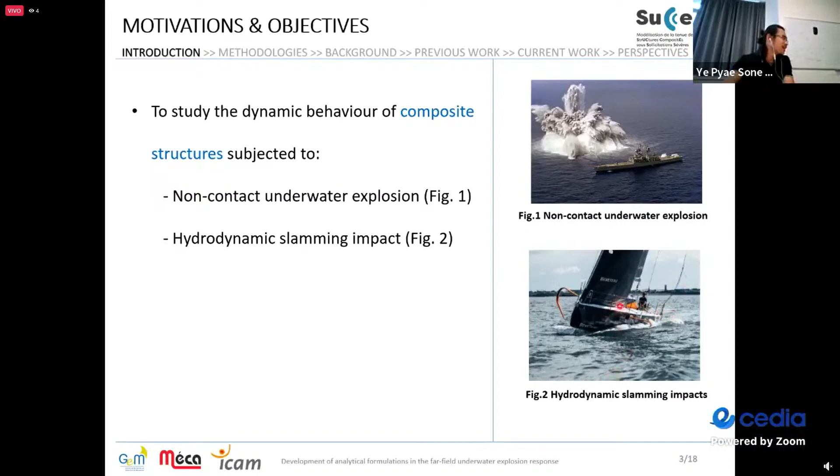For my presentation, I focus only on the underwater explosion, to limit the scope. We have some practical application structures, something like the sonar dome, or underwater ROV, remotely operated vehicle. And when you have a mine, and it explodes, you could have damage to your robot.

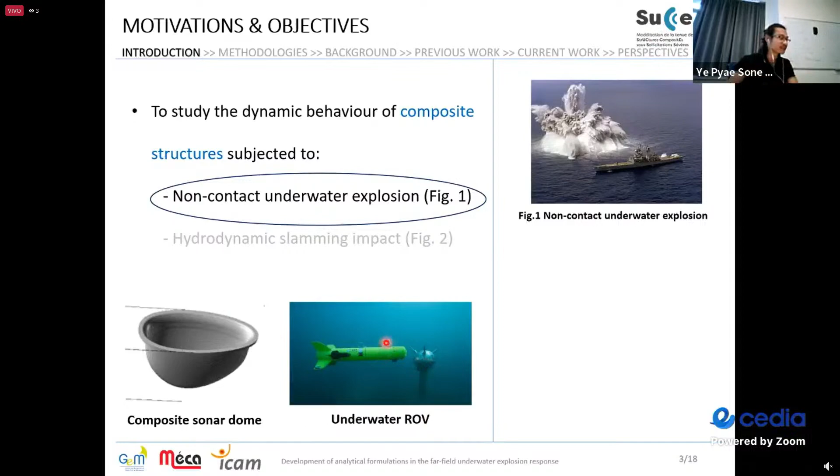So we will see. Regarding the methodologies, we have three main methods. As everybody knows, first we have the experimental way to study how the explosion behaves. For example, this is one of the tests from a couple of years ago, in Toulon, a city more in the south, one of the bases of the French Navy.

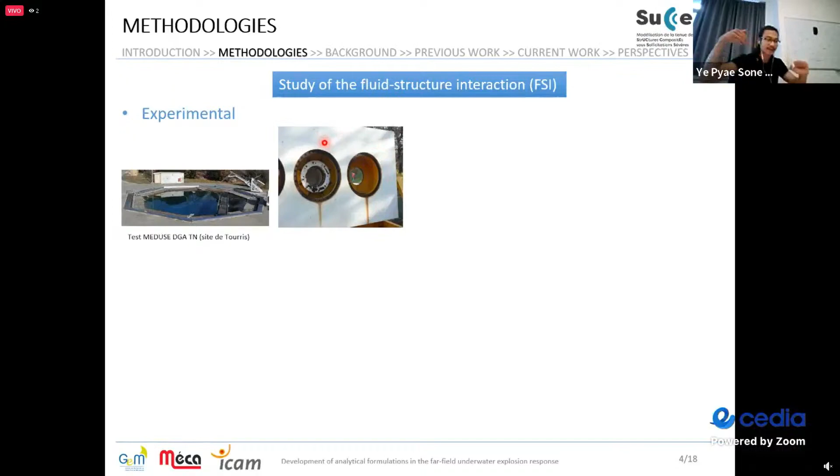They have what I would call a detonic basin, meaning a pool, where you put the explosives and then explode. They use this sort of structural setup, a main frame that holds the structure, and then you have the effect of the explosion. I will show you the schematics here, so you have this frame.

The frame, and then you have these plates. This is one of the plates. You can test, for example, 3 different plates simultaneously like this, to understand the directional effects of the explosion, for example when you are directly under the charge, or at some angle from the charge.

So you have the target plate, which is a circular shape, but can be any material you like: aluminum, steel, or composites. In our case, composites means carbon fiber epoxy or glass fiber epoxy, which is the main material we would like to study. We have this explosive charge, and then these submerged frames—usually sometimes we hang it, or sometimes it floats, at the natural buoyancy point.

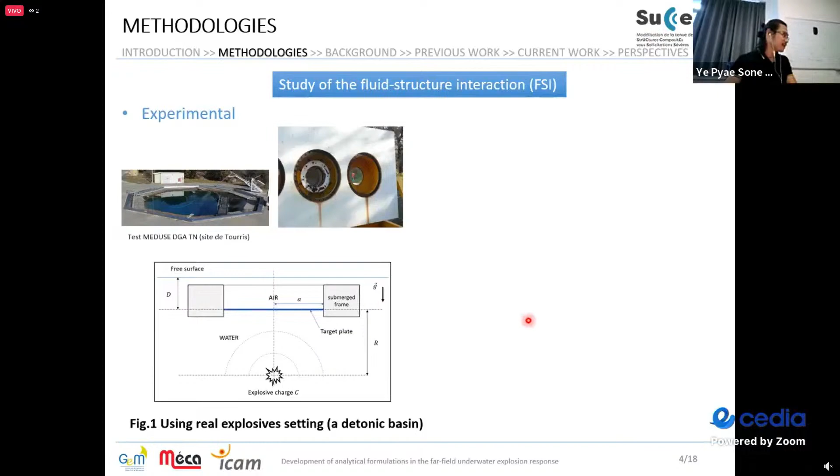And then there is air behind the plate, so you have water on one side, then the explosion wave, and air on the other side. I don't think there is a camera here, but you observe using the strain gauge, and sometimes you can measure the plastic deformation. There is also some sort of test—we don't have it in France, but this is one of the photos from the United States.

So in 2015, in China, United States, and I think in Australia, they have these sort of facilities. They try to mimic the shock wave of the explosion. I'll show you later some plots of how it works. For now, these are the sort of facilities we use to understand this.

The advantage of using this sort of setup is you are working at a smaller scale, so it's less expensive than using a pool, and you're in a more controlled way, so it's less dangerous because you don't need to deal with real explosives. For example, you have this pressure tank, and then you have some sort of diaphragm, and then you increase the pressure.

At some pressure the diaphragm will break, and then there is something called a projectile somewhere inside the gun barrel. When the valve breaks, the projectile will travel all along the gun barrel and then hit a water chamber. There's some sort of rubber or something, and when it hits this diaphragm, it will generate a shock wave. It's more of a one-dimensional propagation of the wave. It's not exactly the same, but this is another way of trying to mimic the loading from the explosion.

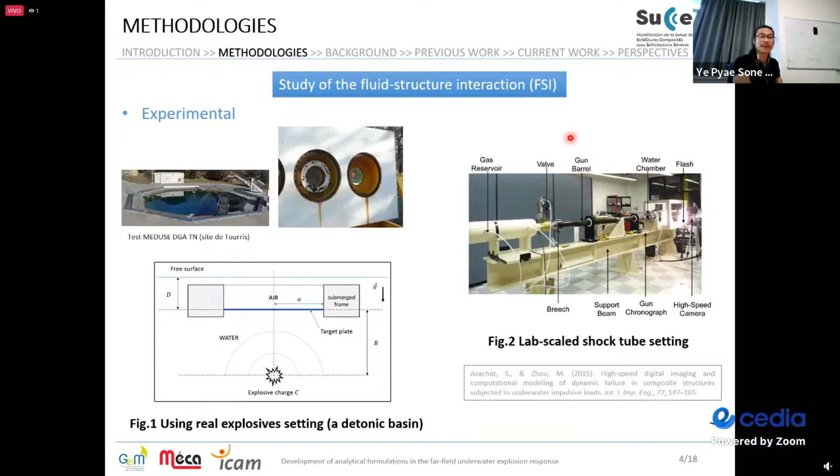So let's go to the second method we use to study this sort of explosion, which we call numerical. I'm sure everybody knows we use finite elements, and there are a couple of different ways—many different ways. So I try to limit my scope to what I studied during my doctoral studies.

Otherwise it would require a lot of tools and numerical setup to study these sort of explosions. So here what we can do is calculate the pressure—I'll show you the equations later—and then calculate the equivalent impulsive velocity. This is a very easy way to do this, because you can model just the structure. You impose the impulsive velocity on the shell element, and then you study it. It's just an initial value problem, and very quick, but I'll show you the results later.

This sort of approach is not always very sufficient. It is very fast, but there are some discrepancies—some differences when you compare it to the experimental results.

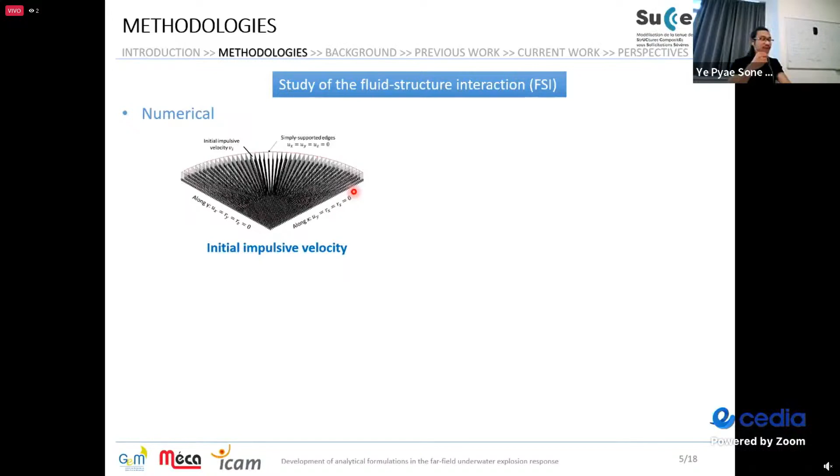The second sort of tool is called LS-DYNA. I use LS-DYNA a lot. It's a nonlinear commercial finite element tool. You can also try Abaqus, or Patran—maybe Patran isn't very efficient when it comes to dynamics, but you can use Abaqus, for example. And LS-DYNA becomes basically the same as ANSYS right now, because they bought it.

There's also a letter like USA, which means Underwater Shock Analysis. It's a special extension of LS-DYNA. Normally we don't have access—you have to request access from, I would say, the military, or you need special permission and a special license to use this tool. So it can sometimes be quite administratively complicated. Not everybody has access to this tool.

So, going back, the second part of the approach is the boundary element approach. Here we don't have any fluids anymore, just a structure, but we have this boundary. Maybe some of you know what boundary element calculations are. We don't really use fluid elements, but at this boundary we treat it as if there is something like a membrane of fluid encompassing the structure. So there is a structure, we don't have a real fluid. Why? Because to include the real fluid would take a lot of time and be very difficult.

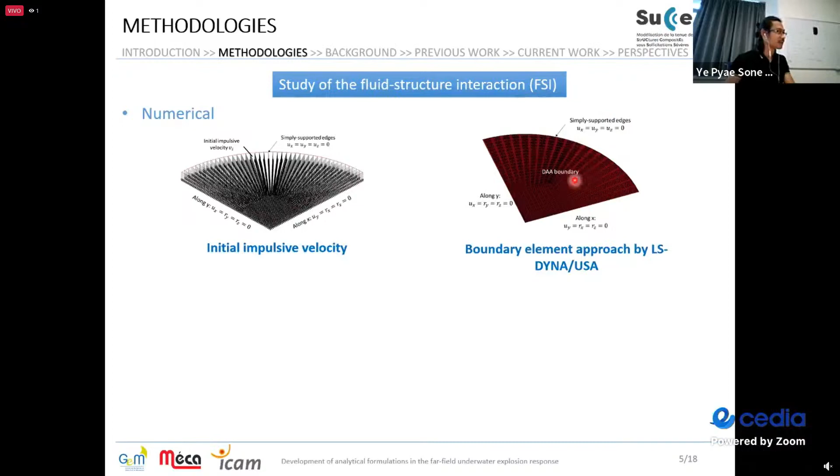By the way, I only show something like a quarter of a circle because we want to study the circular plate, but if it is symmetric, if the explosive charge is directly under the plate, you don't need to worry about the asymmetric effect. Maybe in reality there might be, but in the simulation this is completely ideal, and the loading will be symmetric. So the deformation is symmetric, so you don't really need to model the whole complete plate, just a quarter is sufficient. Then you apply the symmetric boundary condition here and here on the edge.

And then here is something like a simply supported condition. You can try a clamped boundary also. You can try many things.

It's very fast. And then the last approach, you also model the fluid, but it is not the real fluid elements. Real fluid elements, I mean the fluid elements which we use in CFD software, but that is really expensive. So we are using something else, something special. We have a lot of special tricks to save time.

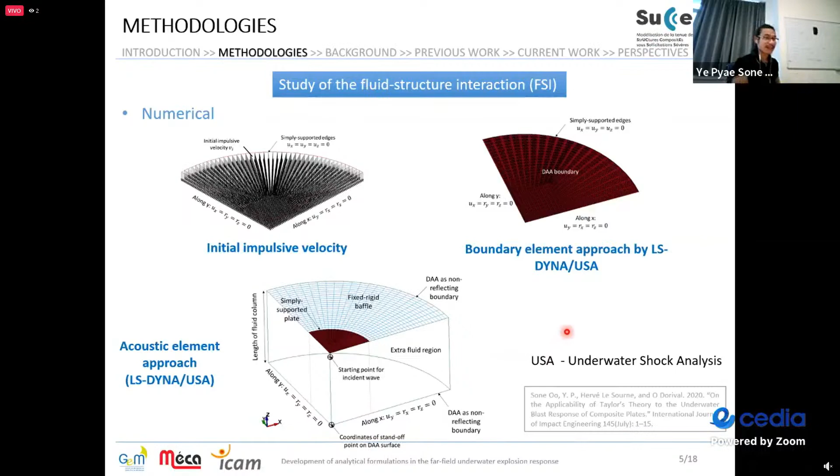But then what about the reliability? I will show you in a couple of minutes later when I compare all these results with the experimental results. We have a lot of tricks, and it takes a lot of time to model this problem. Even though you see it's only a circle, only a plate, it can be really difficult.

And then the final approach, which is also my thesis, is about the analytical development. So analytical development means - numerical tools are always generic, always general. You have these sort of equations, and I don't want to repeat all these. How is it about this numerical approach?

But analytical tools mainly come from the first principles. So first principle, something called a physical sense. They come from some physics, some geometry, and then you derive the equations according to these. You have governing equations, you have boundary conditions, you have an initial condition. So you have the partial differential equation, you solve it, and then you have the final equation to solve.

It's very easy - not so easy to derive, but very easy to implement in some programming tool like MATLAB, for example, or Python. So here is one of the plastic deformations, the deformation of a cylinder. You have an explosive charge, and you have a plastic deformation. So all this form, you model it.

So this is not exactly my research. This is one of my predecessors, the one before me, but working in the same laboratory. He developed a model for a cylinder, represented as a plastic string resting on plastic foundations. Okay, I will skip the details, otherwise it will be too complicated.

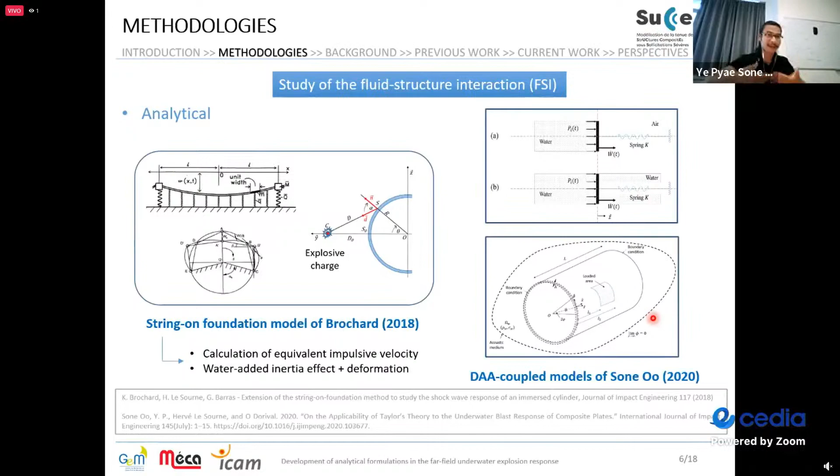So why are we developing analytical methods? I would like to repeat again why, because you can see numerical, everybody is doing this, but then you have to remember that it can be computationally expensive. It means it takes a lot of hours, many hours. Sometimes we don't want that - we want some results really fast. And then it is complicated because compared to the analytical tool, numerical is much more complicated because you have to set up your model.

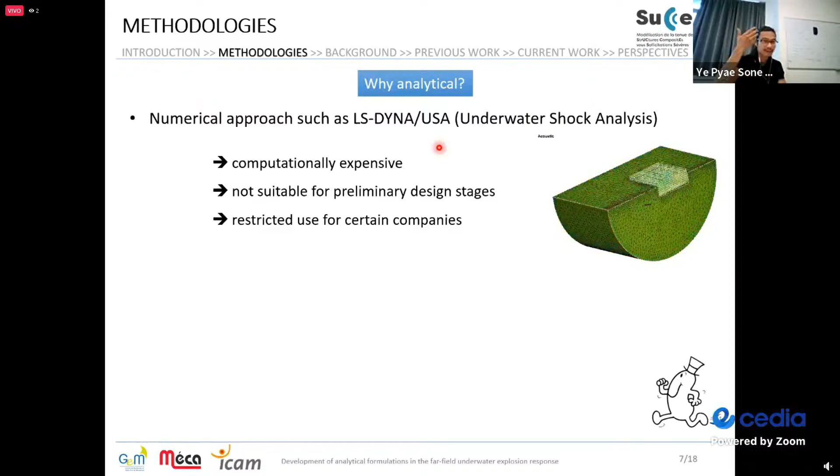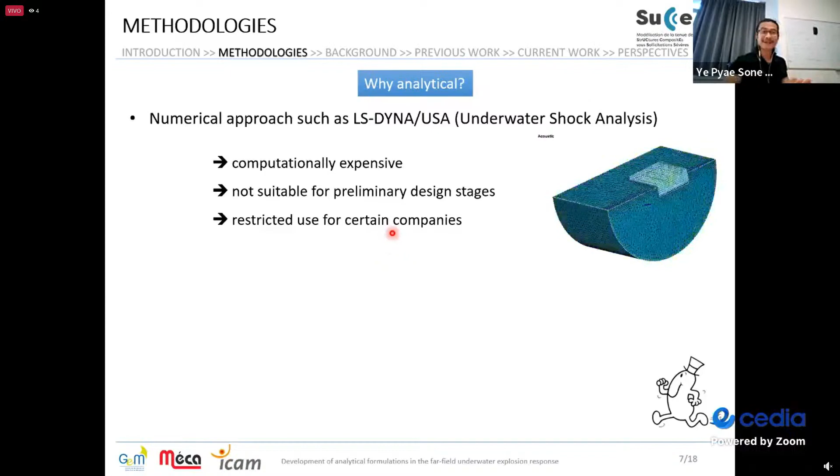Not only the modeling, you need to know the parameters, and then you set up all these parameters, and you also need enough experience and knowledge to know what you are expecting, what your results should be. And then when you interpret the results, it can also be challenging. I have shown you this tool for this problem - sometimes you have these administrative complications. So the analytical approach is very fast, very simple. Of course, not so easy to derive, but once somebody already develops it - for example, there are so many papers - you can take advantage of that.

You can code in MATLAB or Python, and then you can study so many design studies. So the only drawback is sometimes analytical tools only work for really simple geometries, like a square or rectangular plate, circular plate, or a cylinder.

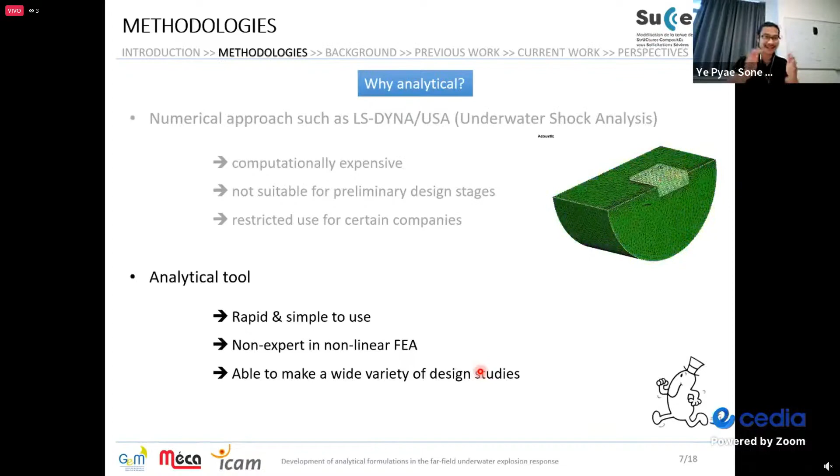Okay, so now a little bit of basics. So we have the explosion - this is an exothermic chemical reaction. It's really an unstable compound. So you imagine you have an explosion - boom - and then there is a shock wave.

There are so many aspects, I will show you another slide later, you will see. But first of all, when you have an explosion, what you need to understand is you have this very unstable compound, and then it releases a huge amount of energy - energy in terms of temperature, so very high temperature, just very hot, and then a huge amount of pressure.

So the water immediately around it is compressed, and then this compression goes into another place, so it is like a compression wave going. So at first, the compression wave is above sound speed in water. So at first it is very fast and the pressure is very huge.

But then the pressure is falling, and how do we know this? A lot of people already studied this, mainly with a lot of developments during the Second World War.

In fact, research already started in the First World War, but a lot of documentation I found was during the Second World War. They already tested using pressure transducers, which existed around 1930, 1940s, 1945, 1950s, and later on continued to study. Even though we had some treaties, people studied in their own smaller scales.

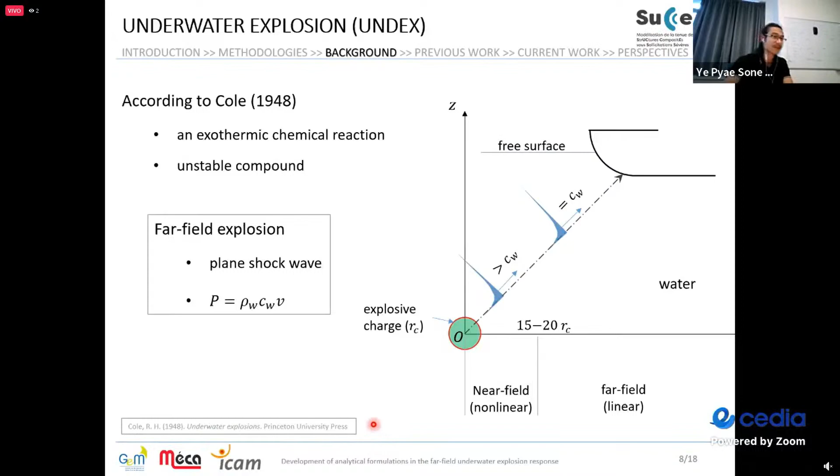In terms of the physical phenomena, you can see that first there is a pressure wave, something like this. I will show you the equation - it's the exponential form. You can really see the exponential form, it's a decreasing exponential form, so it's negative here.

After the explosion, you have this first pressure wave, and then after that, you have this oscillation of the gas bubble.

Unfortunately, I didn't have the video, but you can check, it's very easy to find it on the internet. Some people may already have some idea.

It makes sense, because first it releases a huge amount of pressure, and then in the second phase, the pressure is significantly smaller. This is just a representation, not supposed to match exact values, but when you put the values in, we've already seen from experiments that this figure is approximately true.

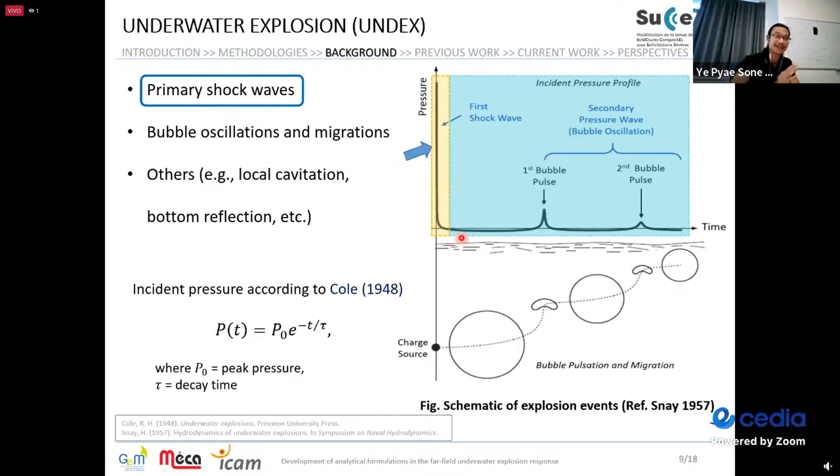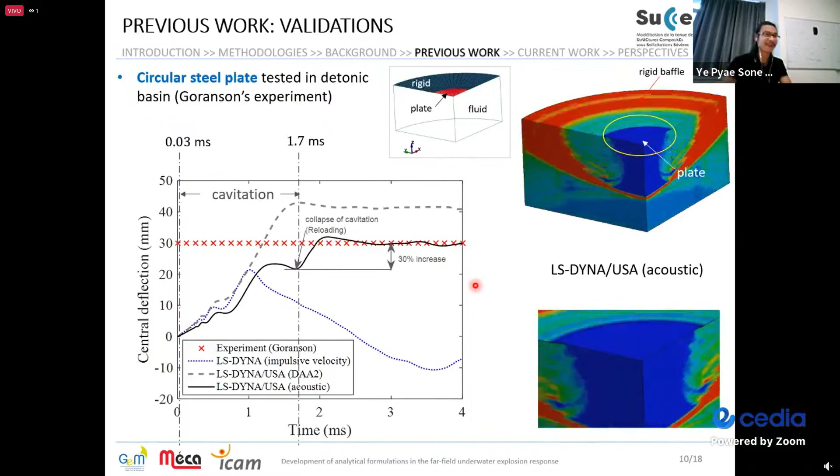I will not go into very detail here. These are my publications - I put some of them, including the one I used to model and develop this analytical formula.

I also consider something called geometric nonlinear effects, which occur when you have large deformation. Normally when you study quasi-static or even dynamic cases, the force and the deformation or acceleration of the plate are directly proportional. Maybe some of you have done a 3-point bending test - you'll see that force and deformation form a straight line on a graph. But you'll reach a certain limit, and after passing it, you're no longer linear - maybe parabolic, we don't know. This is why we call it nonlinear. There are many nonlinear effects, but this is one of them - large nonlinearity due to large deformation.

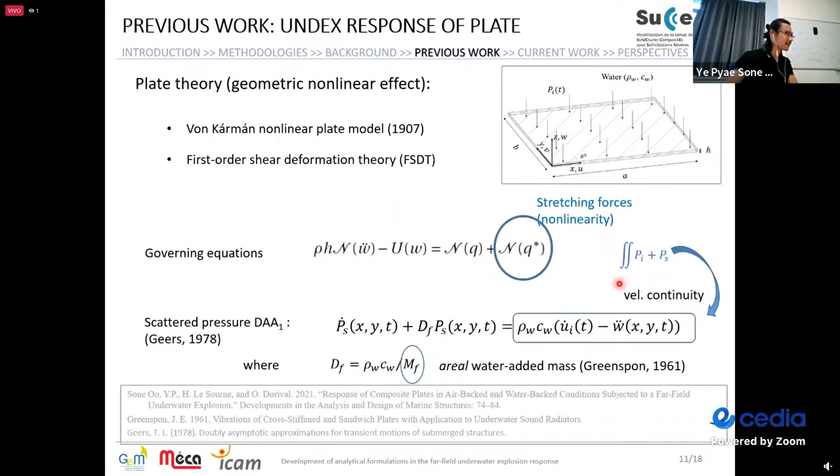And the first order shear deformation theory, but I don't want to go into super detail about this. Some results on the simply supported carbon fiber epoxy plate that I used. So there are some of the properties of the material, the loading that we intend to use for our case studies.

Of course, in my article I have done some parametric studies as well. Parametric studies means I keep several parameters but change one of them, to understand the effect. So you can see it's a comparison between my analytical method and the result of the numerical tools. I won't go into so much detail on this diagram now.

This is just a comparison of the results of the deflection between my tool and the numerical tool to understand. The numerical tool, we already studied its effects using experimental results. So the idea is to validate our analytical tool to say, hey, we can use our tool — it's faster and easier.

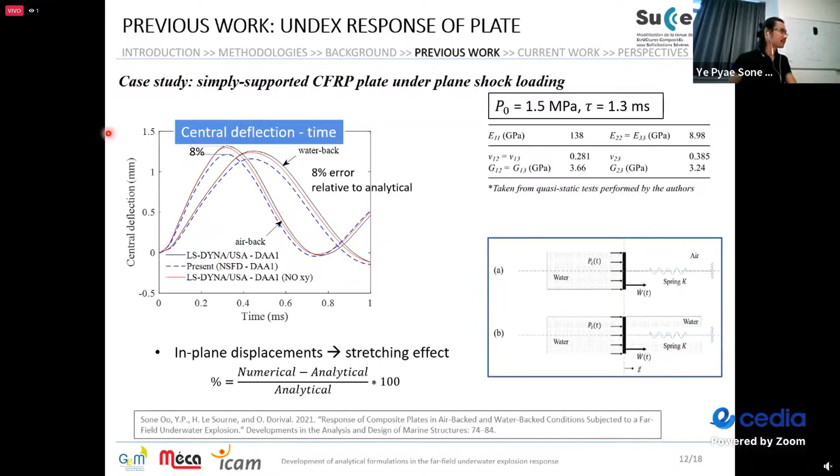So like this, and this is my current studies. After studying the plate, I shifted my research more into the cylinder. The idea is the same: on one side you have an equation for the cylinder, a little bit more complicated, and on the other side you have the equations for the pressure. To save time, I won't go into very much detail.

This is the governing equations. It is called the modal approach. It's very common in vibration studies. You have a wave in, let's say, the longitudinal direction, and then a wave in the circumferential direction — so it is a letter M and a letter N here.

The modal approach allows a superposition of all these waves, and when you sum them all, you can plot the deflection at any point anywhere you want. This is a really fast way to solve this type of problem, but we are only at the beginning.

So you can see it's a classical shell theory — some of you might have heard of it. Usually in beam theory we call it Euler-Bernoulli. The beam is a really easy element, but then you increase the dimensionality: you have a plate, and if you want to be more complicated, you fold the plate like this, so you have a cylinder — basically the same idea. And then if you have curvature in both directions, you have a shell.

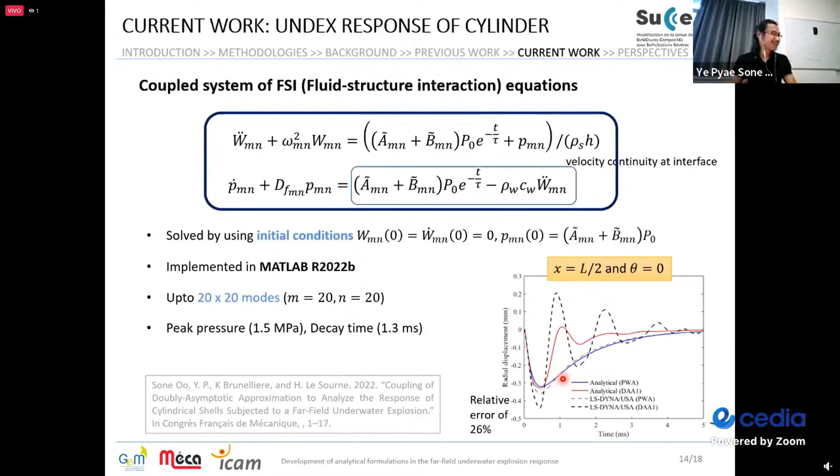Right now, in developing the equations, by shifting into different sorts of geometry, what I realized is that sometimes with the plate, you have an explosive, and if you are far enough, the pressure is more or less uniform — that's okay. What is really complicated is that you don't have the same pressure at different points of the surface. You can imagine an explosive: here maybe the largest load is, but if you go around the circumference, the loading is not the same. So we encounter this sort of problem.

So I modify — if you may remember, the equation is really simple, but because of this there is also a Heaviside function, one of the mathematical functions that goes between 0 and 1.

So you have to use this because the pressure form is exponential like this, but you have so many pressure profiles which are not only the same exponential, the same slope, but also not the same level. And also they don't start at the same time.

Sometimes they are zero and then they start right away. So you have so many pressures plotted at different points along the circumference of the cylinder, and when I develop my equations, I need to consider this effect, which complexifies things a bit. I call this the time delay effect.

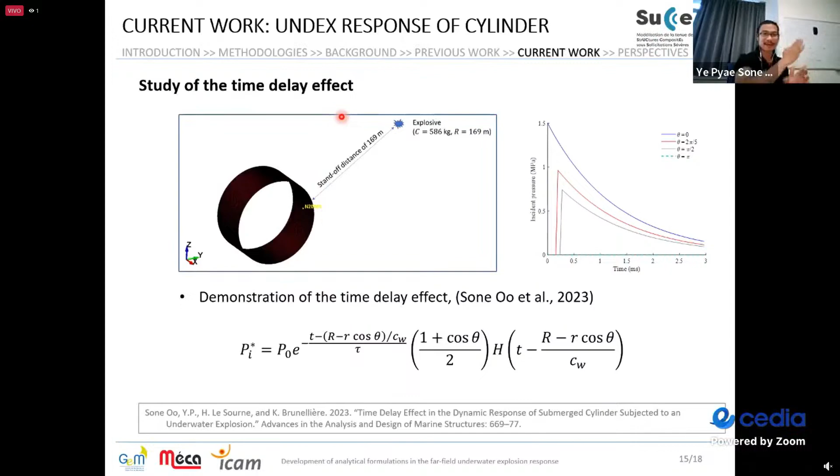Because the waves came in, but not at the same time - some of them are delayed by the geometry. And these are the equations. The idea is the same: structural equations on one side, and then fluid equations. I have two different models. One model, called the early time model, where I only consider you have a pressure wave and then these interactions due to radiation.

It's a technical term. So the second part of the equation is more complicated because you have something called radiation effects, and at the same time something called water added mass effect. Water added mass is when you don't have cavitation. By the way, in my studies I don't consider cavitation.

Cavitation is a phenomenon - I'll explain with a movie, a little animation - where your pressure becomes zero and then suddenly you don't have anything. It's very complicated, so I don't consider cavitation. So if the water remains in contact with the plate all the time, that means we don't have cavitation.

But there is another problem to consider, because if the water is attached to your plate all the time, when your plate accelerates, this water accelerates or decelerates together with the plate. This is called the water added mass effect.

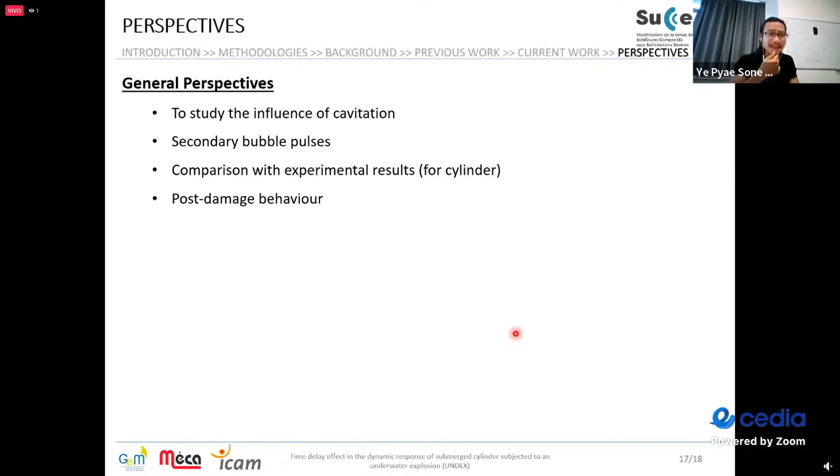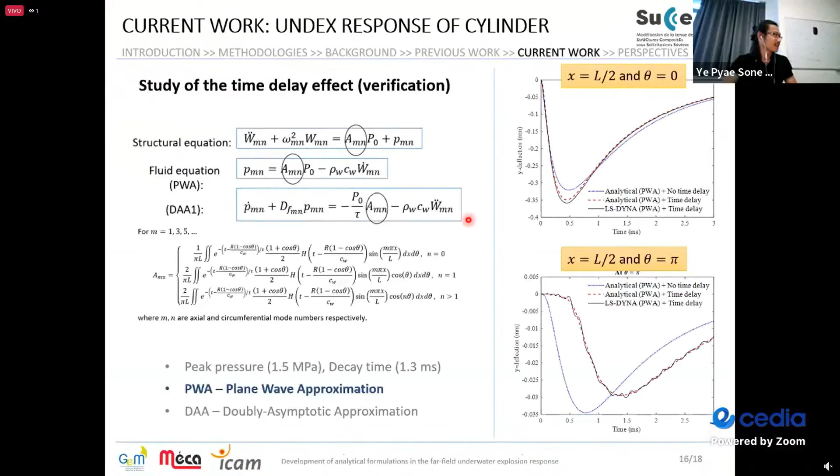Let's go back. Yeah, this is a really interesting question. Exactly, yes. So the last page, there, exactly. You consider thick and thin. In the model, what's the difference?

Is it that in the thick case you include shear stresses? I include both the shear stresses for both of these models. But for the thick plate, the importance of the shear is more. Because I am considering first order shear deformation theory for both of these models.

I have done a lot of tests also. I am saying thin to make it easier to differentiate, but in fact I should have included the ratio between the length and the thickness of the plate. So the first one has a length over thickness ratio of around 60, and the second one is around 20, so it's 3 times smaller. It's the same thickness - thick and thin doesn't really mean a huge thickness difference.

No, it's relatively speaking. The first one is very long, and so even if the thickness is the same, when the plate is really long, you can imagine it's very flexible. It becomes more flexible, so the stiffness is not the same. And it has a lot of consequences when we talk about the shock wave and the loading, because I was really interested in studying the behavior of cavitation. In some cases we saw that there is cavitation, so the more flexible the plate, the more we have cavitation.

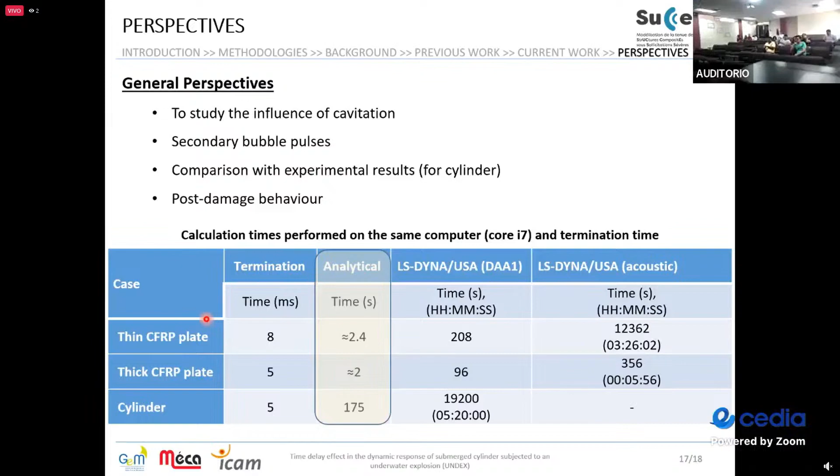By the way, I would like to invite you here in Ecuador sometime, in case you want to come. Yeah, I would love to, it's a really nice country. Yeah, it's a very nice country and really good food here. Yeah, so I would be happy to visit sometime in the future. We will see, okay, thank you.

Yeah, thank you too, so goodbye to Yaya please. Okay bye, have a nice day. I think it's daytime there. Yes, it's almost 12 o'clock. It's more evening here, so it's around 6:45, so I need to go back. Goodbye, okay bye, so I will disconnect.